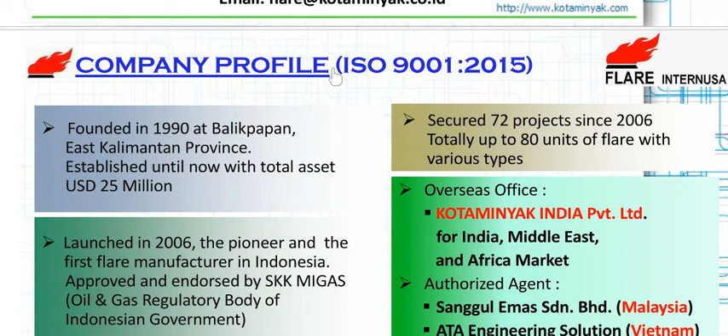This is Flare INTERNUSA Experience at Kotaminyak. Founded in 1990 at Balikpapan, East Kalimantan province, established until now with total asset $25 million. Flare INTERNUSA is launched in 2006, the pioneer and the first flare manufacturer of Indonesia.

Approved and endorsed by SKK Migas, oil and gas regulatory body of Indonesian government. Starting 2011 business expansion to worldwide market. Manufacturing facilities located at Dadap, Jakarta with workshop of 2,700 square meter and warehouse of 1,800 square meter.

Secure 72 projects since 2006. Totally up to 80 units of flare with various type. Overseas office is in India, Middle East and Africa market.

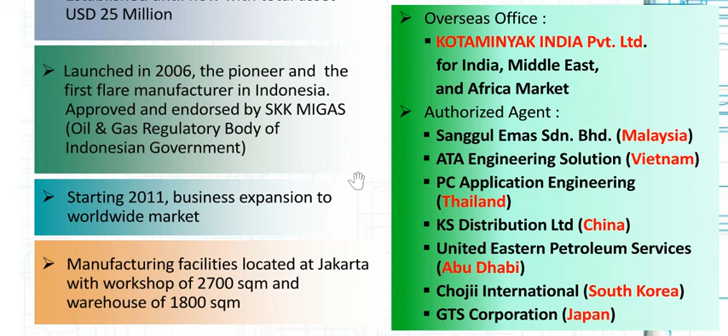Authorized agent, Sanggul Emas at Malaysia, ATA Engineering Solution at Vietnam, PC Application Engineering at Thailand, KS Distribution Limited at China, United Eastern Petroleum Services at Abu Dhabi, Chojii International at South Korea and GTS Corporation at Japan.

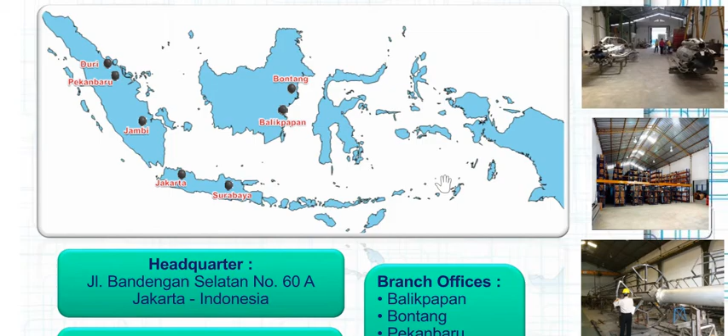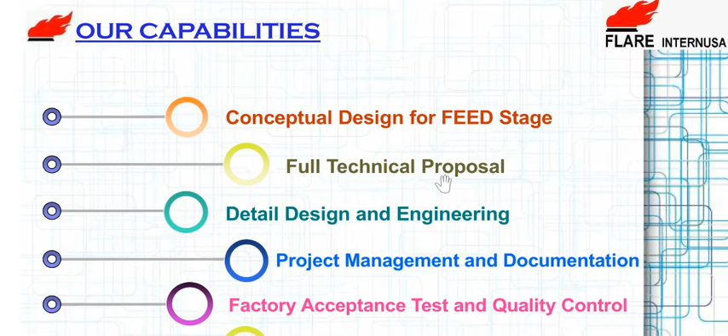Our capabilities: conceptual design for FEED stage, full technical proposal, detailed design and engineering, project management and documentation, factory acceptance test and quality control, commissioning and troubleshooting, customer support and after-sales service.

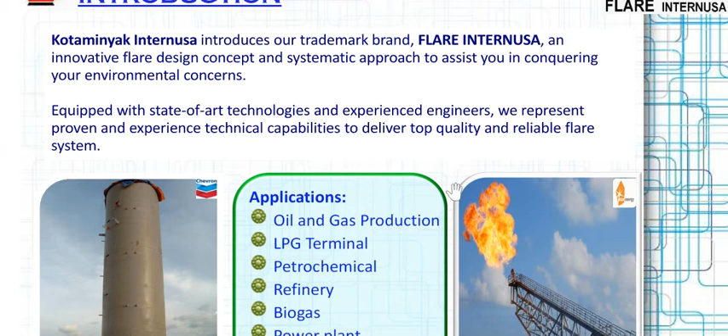Flare INTERNUSA is an innovative flare design concept and systematic approach to assist you in conquering your environmental concern. Equipped with state-of-art technologies and experienced engineers, we represent proven and experienced technical capabilities to deliver top quality and reliable flare system. Application to oil and gas production, LPG terminal, petrochemical, refinery, biogas, power plant, fertilizer plant, and so on.

Our customer. The overseas market is 10%, Indonesia is 46%, G7, Europe, and Australia is 42%, the others is 2%.

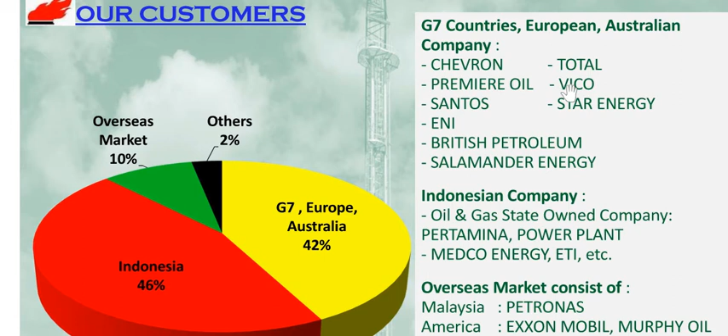The G7 countries, European and Australian company includes Chevron, Total, Premier Oil, VICO, Santos, Star Energy, Eni, British Petroleum, Salamander Energy. Indonesian company, oil and gas state-owned company, Pertamina Power Plant, Medco Energy, ETI, and etc.

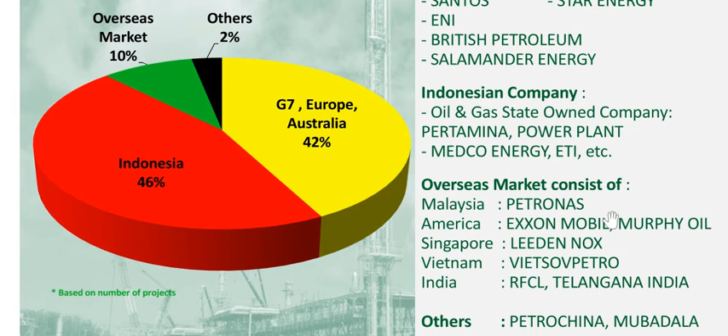Overseas market, Malaysia is Petronas, America is ExxonMobil and Murphy Oil, Singapore is Leeden NOX, Vietnam is Vietsovpetro, India is RFCL, Telangana, India, and others PetroChina and Mubadala.

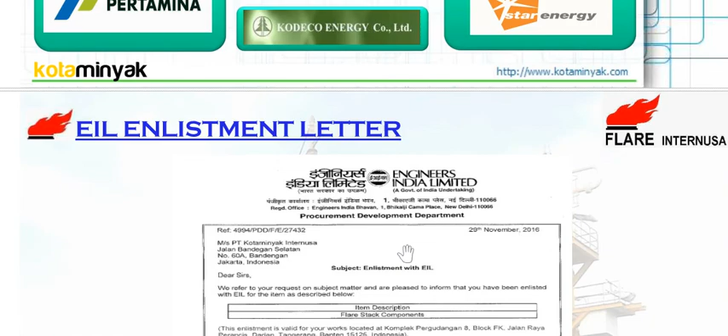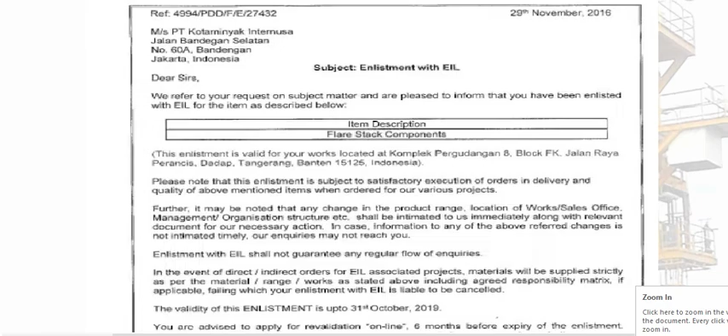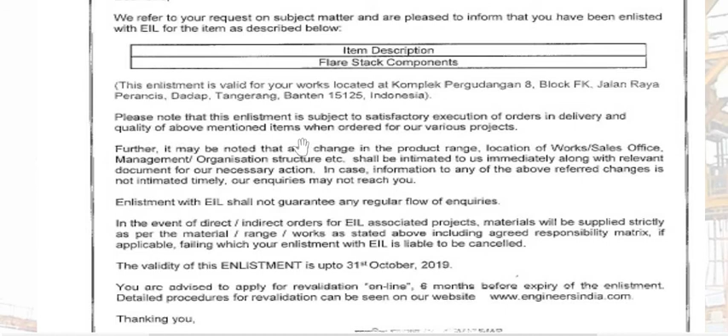Please note that this enlistment is subject to satisfactory execution of order in delivery and quality of above mentioned when ordered for our various project. Flare stack components.

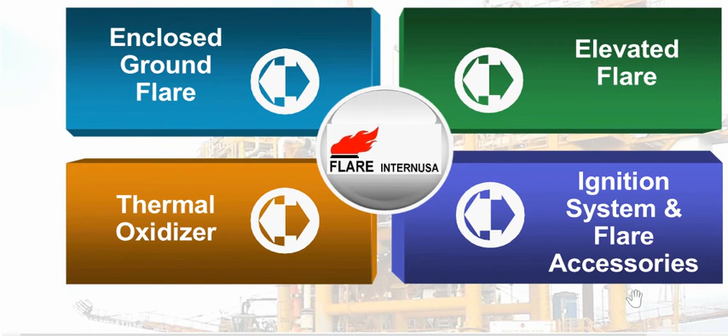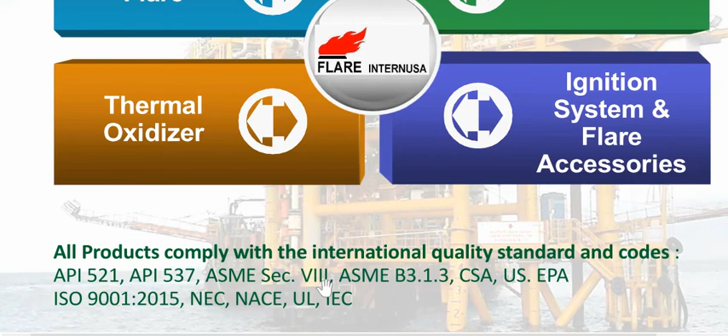So Flare INTERNUSA consists of enclosed ground flare, elevated flare, thermal oxidizer, ignition system, and flare accessories. All products comply with the international quality standards and codes: API 521, 537, ASME Section 8, ASME B31.3, CSA, US EPA, ISO 9001:2015, NEC, NACE, UL and IEC.

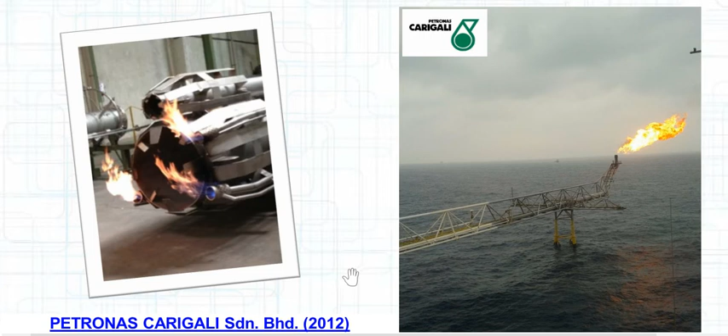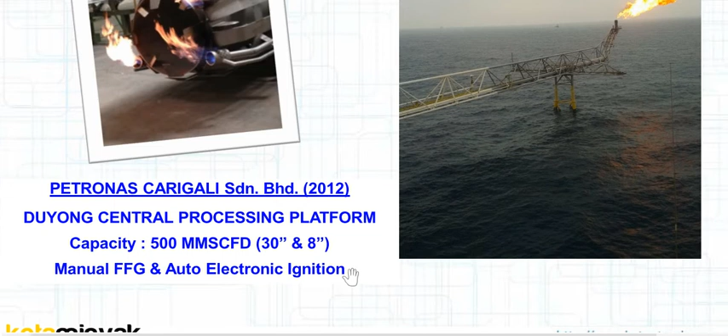High and low pressure flare are common with combined ignition. Project at Petronas Carigali 2012. Capacity is 500 MMSCFD, 30 inch and 8 inch. Manual FFG and auto electronic ignition.

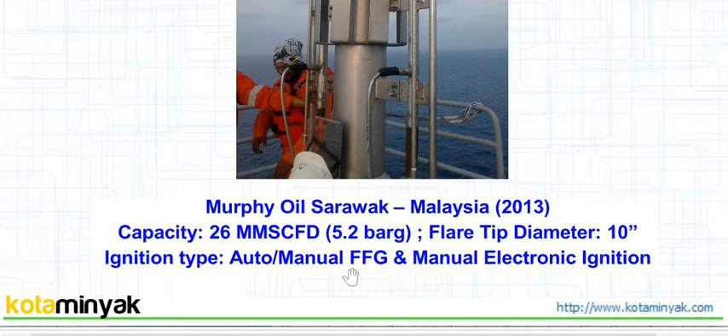High pressure flare at Murphy Sarawak Oil Corporate Limited, 2013. Capacity is 5.2 bars. Flare tip is 10 inch. Ignition is auto or manual FFG and manual electronic ignition.

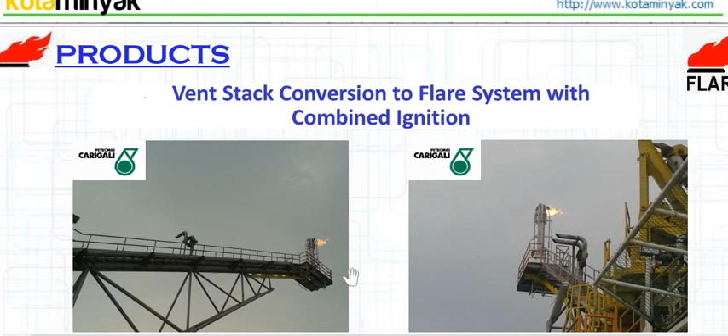We are looking at the experience. Vent stack conversion to flare system with combined ignition. Carigali, Petronas. Location is at Dulang, Malaysia. Capacity is 10 MMSCFD. Flare tip is 10 inch. Ignition type is combined manual FFG and manual electronic spark.

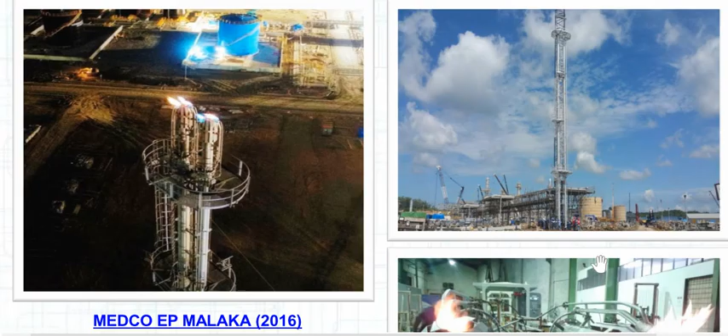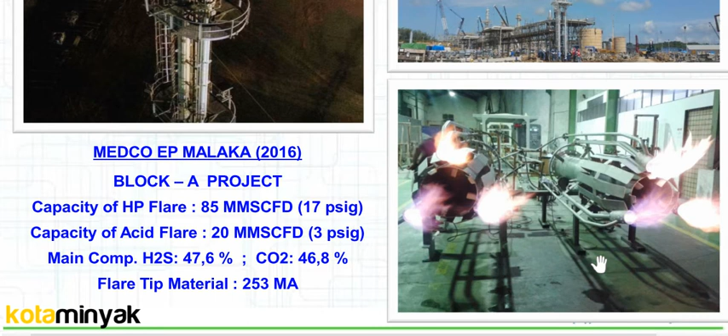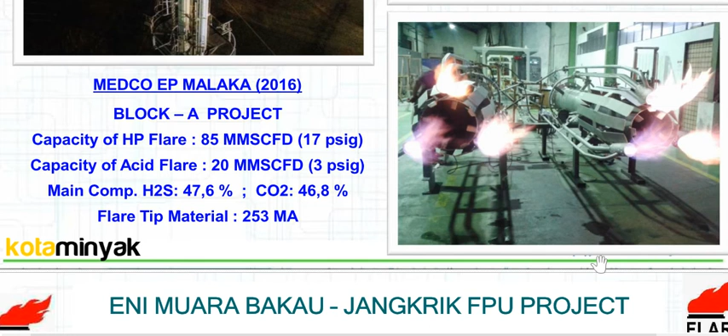High pressure flare and acid gas flare at Medco EP Malaka 2016. Block A project capacity of high pressure flare is 85 or 17 psi. Capacity of acid gas is 20 MMSCFD or 3 psi. Main component is H2S 47.6%, CO2 46.8%. Flare tip material is 253 MA.

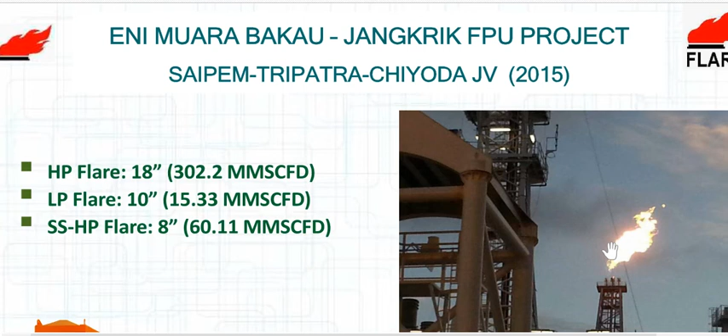Eni Muara Bakau, Jangkrik FPU project, Saipem Tripatra Chiyoda JV 2015. HP flare is 18 inch, LP flare, low pressure flare is 10 inch. SS stainless steel high pressure flare is 8 inch.

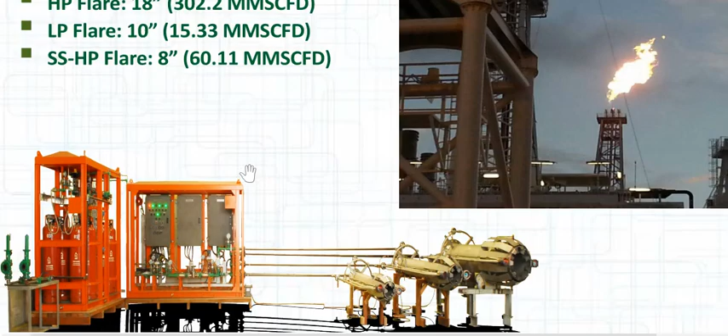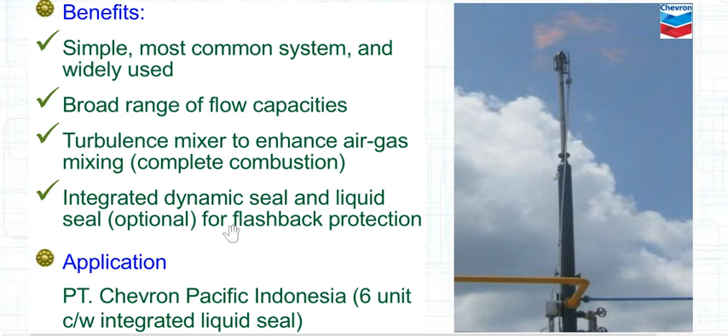Benefits of low pressure flare. Simple, most common system and widely used. Broad range of flow capacities, turbulence mixer to enhance air gas mixing, integrated dynamic seal, and liquid seal for flashback protection. Application is PT Chevron Pacific Indonesia.

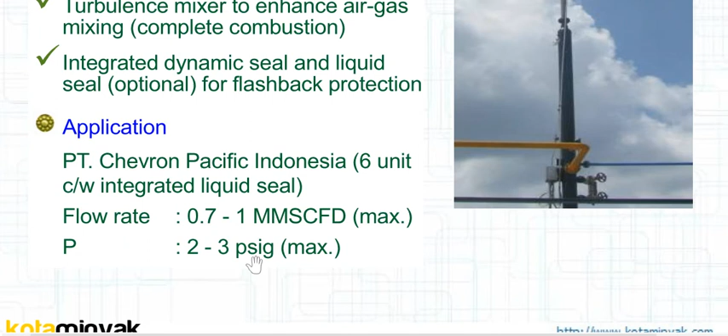6 units come with integrated liquid seal, with flow rate 0.7 to 1 MMSCFD maximum, and pressure is 2 to 3 psig. Combined high and low pressure flare. Benefits is high and low gas pressure are burned in one compact design.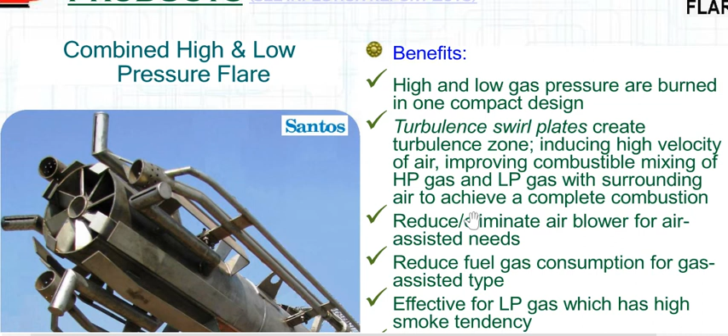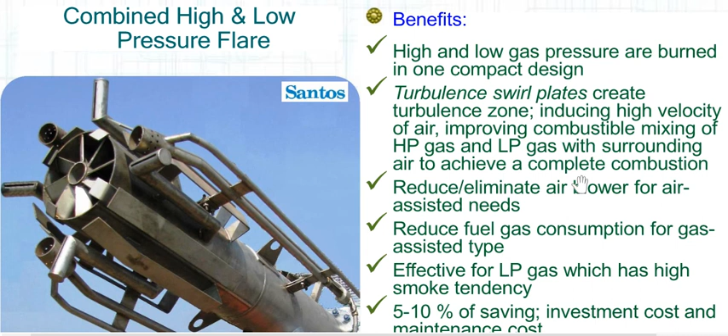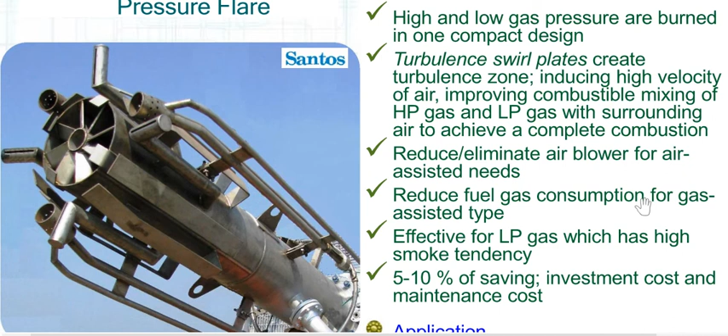Turbulence swirl plate create turbulence zone inducing high velocity of air, improving combustible mixing of high pressure gas and low pressure gas with surrounding air to achieve a complete combustion. Reduce or eliminate air blower for air assisted needs. Reduce fuel gas consumption for gas assisted type. Effective for low pressure gas which has high smoke tendency, 5 to 10% saving.

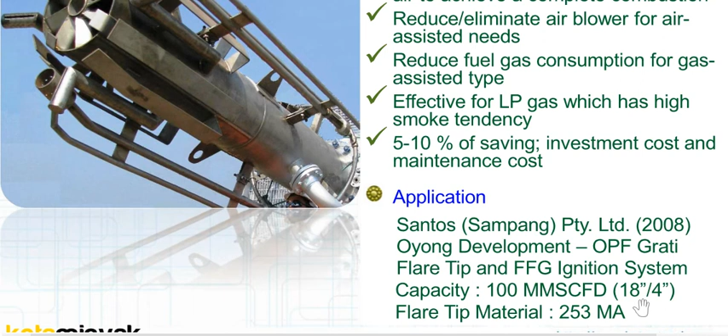The application is at Santos, Sampang at 2008. Oyong development with the flare tip and FFG ignition system. Capacity is 100 MMSCFD, 18 inch to 4 inch. Flare tip material is 253 MA. Combined high-low pressure flare. Star Energy.

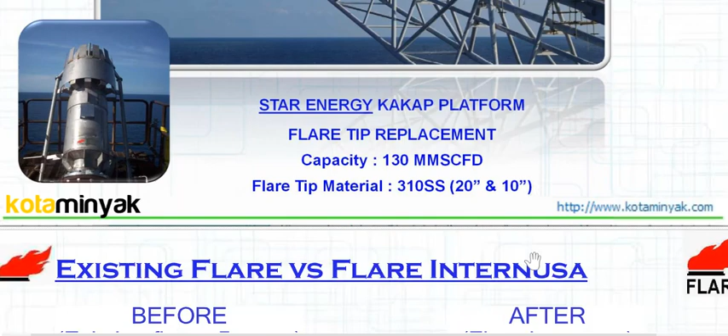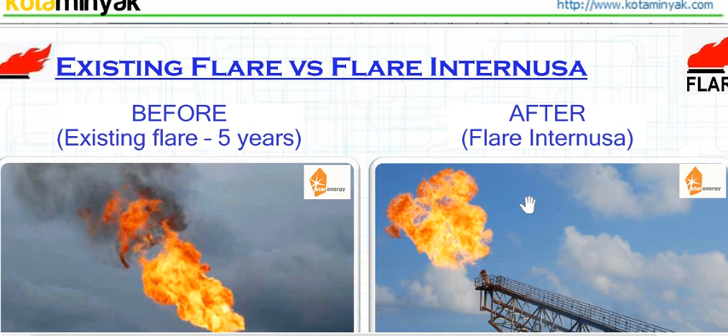Capacity is 130 MMSCFD. Flare tip material is 310 stainless steel, 20 inch and 10 inch. Existing flare versus Flare INTERNUSA, before and after.

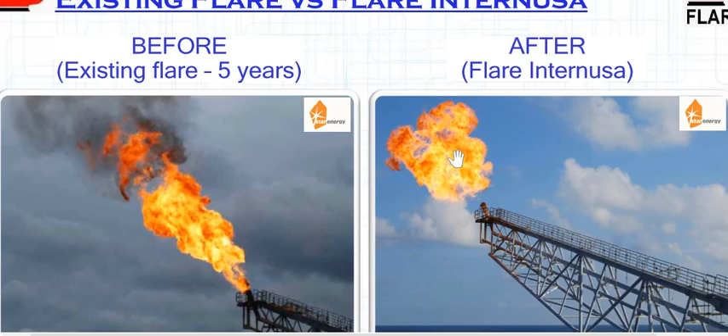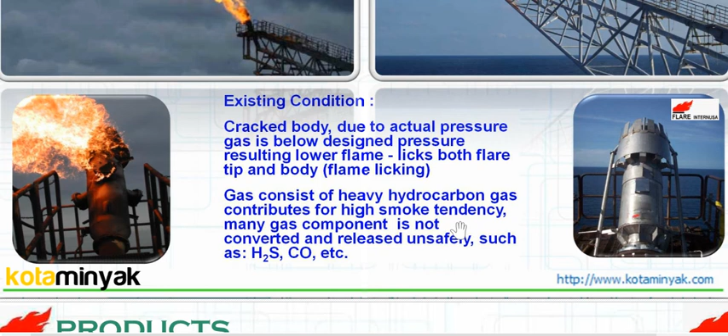For the existing flare, they have fumes. Flare INTERNUSA doesn't have any fumes. Existing condition: cracked body. Due to actual pressure, gas is below design pressure, resulting in lower flame licks; both flare tip and body have flame licking. Gas consists of heavy hydrocarbon gas, which contributes to high smoke tendency. Many gas components are not converted and are released unsafely, such as H2S, CO, etc.

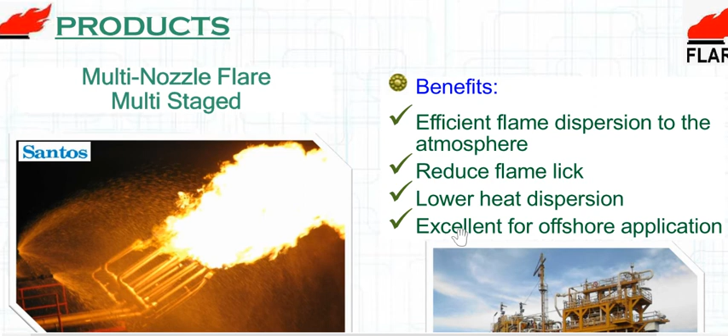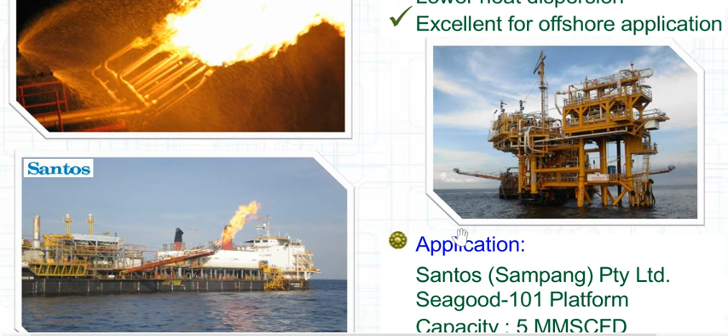The benefits of the multi-nozzle multi-stage flare: efficient flame dispersion to the atmosphere, reduced flame lick, lower heat dispersion, excellent for offshore application. Application is at Santos, Seagood 101 platform, capacity is 5 MMSCFD, flare tip material is 253 MA.

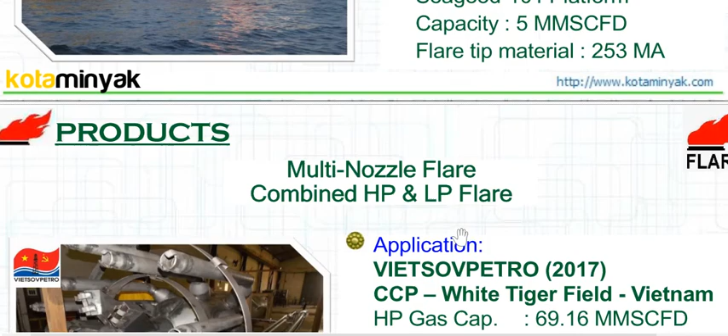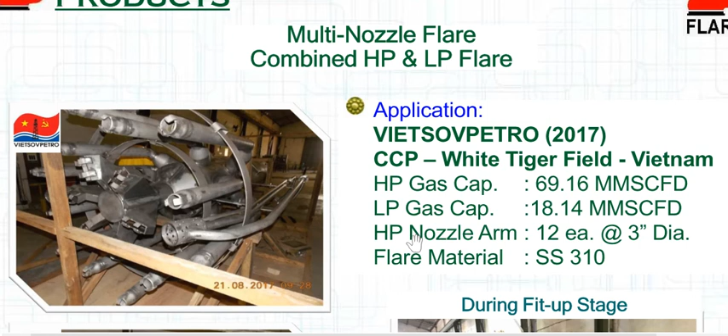Multi-nozzle flare combining high pressure and low pressure. Application in Vietsovpetro 2017 at CCP White Tiger Field, Vietnam. High pressure gas capacity is 69.16 MMSCFD. Low pressure gas capacity is 18.14. High pressure nozzle arms are 12 pieces at 3-inch diameter. Flare material is stainless steel 310. As you can see in the picture, during the fit-up stage.

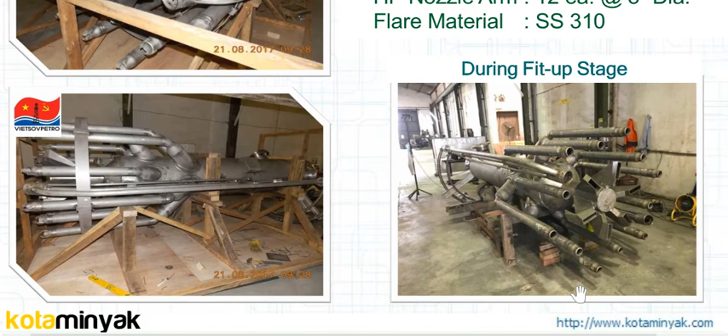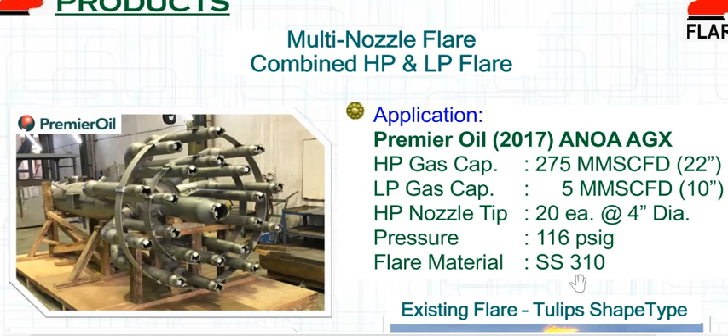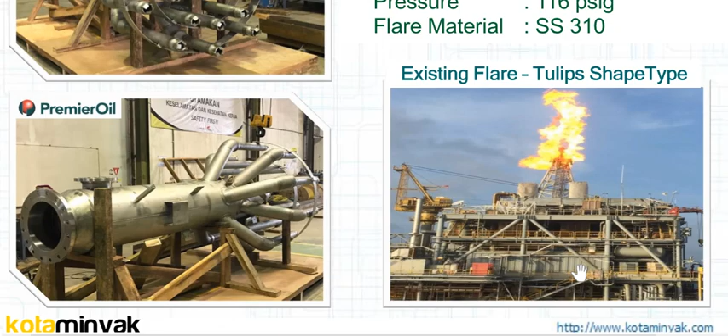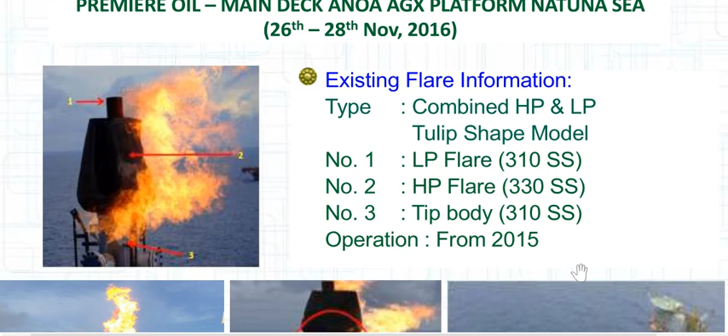Combined high pressure and low pressure tulip shape model. Number 1, low pressure flare, is 310 stainless steel. High pressure flare, number 2.

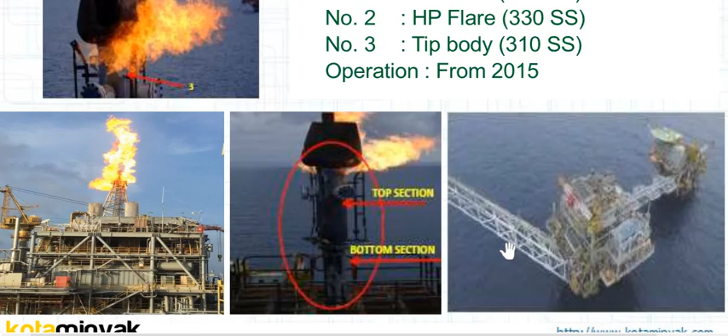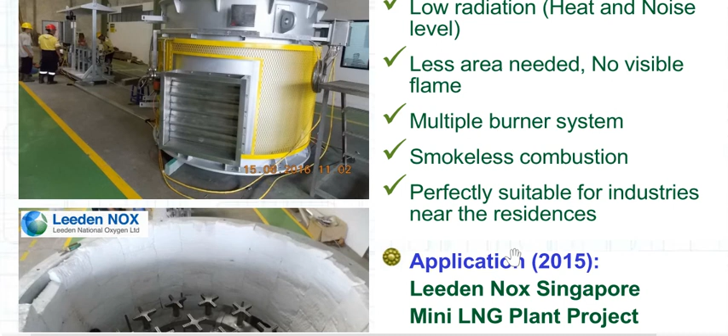Enclosed ground flare. Benefits: low radiation, heat and noise level, less area needed, no visible flame, multiple burner system, smokeless combustion. Perfectly suitable for industries near residences. Applications in Singapore, mini LNG plant project, up to 4.6 MMSCFD with 900 BTU per SCF. Diameter is 2 meters times 7.2.

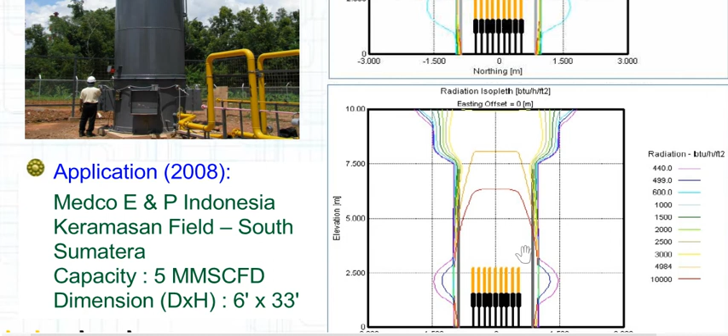Next, application of enclosed ground flares at Medco E&P Indonesia, Keramasan Field, South Sumatra. Capacity is 5 MMSCFD. Dimension is 6 feet times 33 feet.

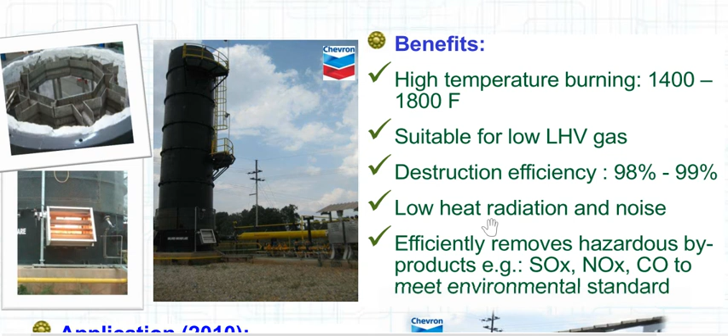Thermal oxidizer. High temperature burning, 1,400 to 1,800 Fahrenheit. We are talking about an enclosed thermal oxidizer, suitable for low LHV gas. Destruction efficiency is 98% to 99%. Low heat, radiation and noise. Efficiently removes hazardous byproducts such as SOx, NOx, and CO to meet environmental standards.

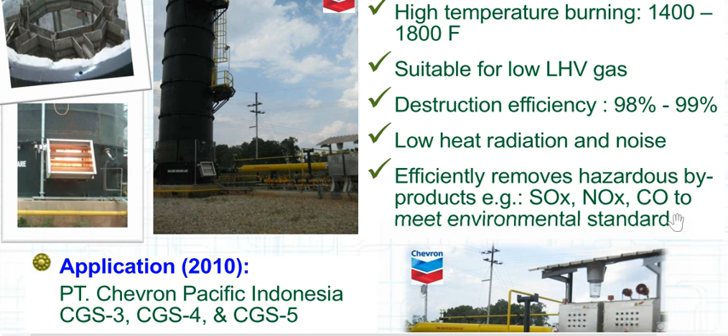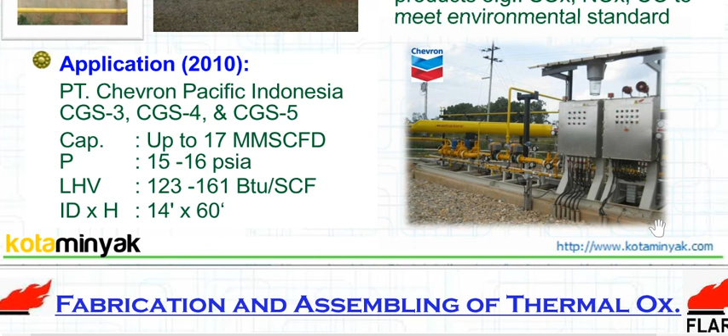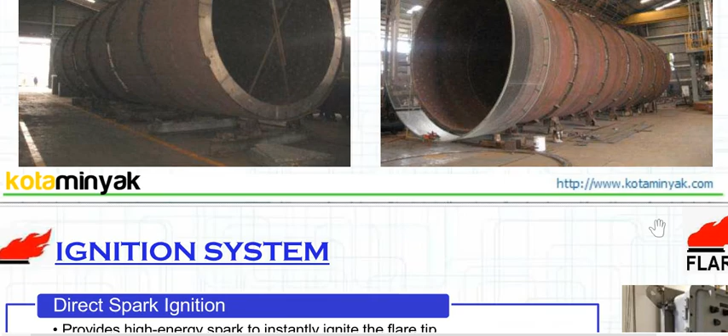Application is PT Chevron Pacific Indonesia. Capacity up to 17 MMSCFD. Pressure is 15 to 16 psi. LHV is 123 to 161 BTU, 14 feet times 60 feet. Fabrication and assembly of thermal oxidizer at Chevron.

Ignition system: direct spark ignition. Provides a high energy spark to instantly ignite the flare tip. Requires electricity only. Highly suitable for remote areas with limited utility facilities such as air supply and fuel gas. Reliable and no carbon deposit.

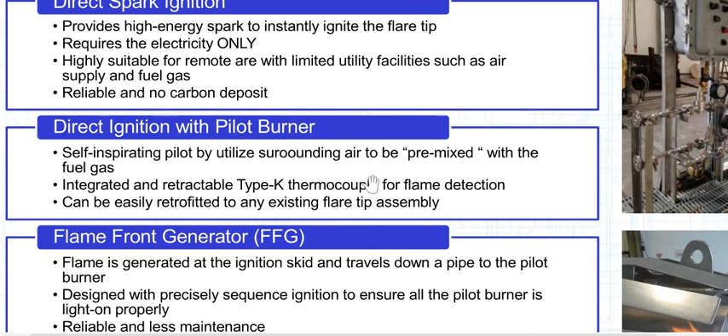Direct ignition with pilot burner. Self-inspirating pilot utilizing surrounding air to be premixed with the fuel gas. Integrated and retractable Type K thermocouple for flame detection. Can be easily retrofitted to any existing flare tip assembly.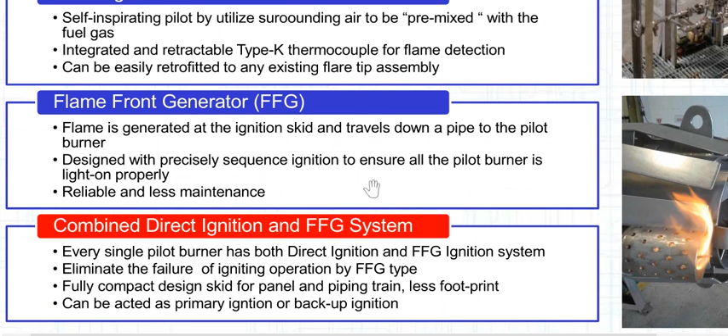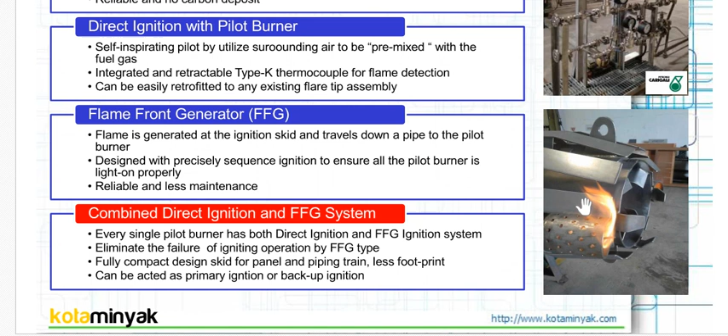Flame front generator. Flame is generated at the ignition skid and travels down a pipe to the pilot burner, designed with precise sequence ignition to ensure all pilot burners light properly. Reliable and less maintenance. Combined direct ignition and FFG system: every single pilot burner has both direct ignition and FFG system, flame front generator.

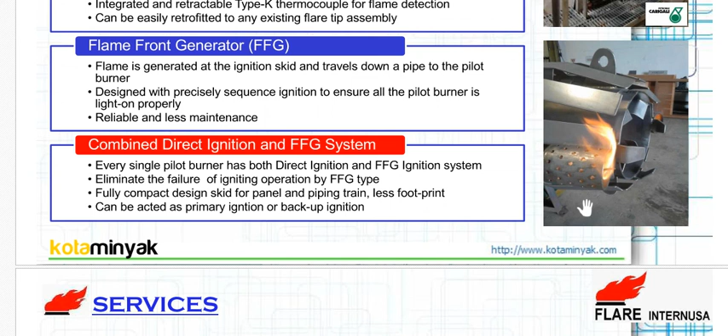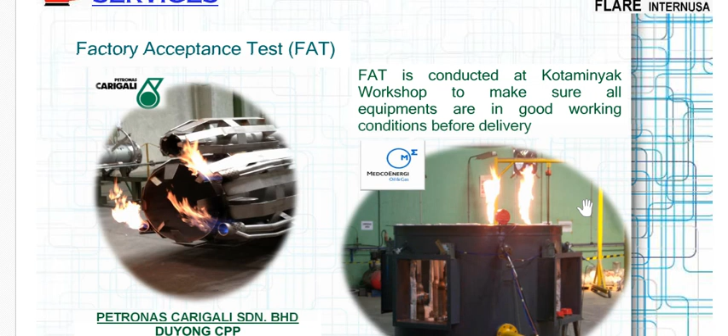Eliminates ignition failure with the FFG type, fully compact design skid for panel and piping train, less footprint, can act as primary or backup ignition. Services: factory acceptance test is conducted at the Kotaminyak workshop to make sure all equipment is in good working condition before delivery, for Petronas Carigali and PT Medco E&P Indonesia.

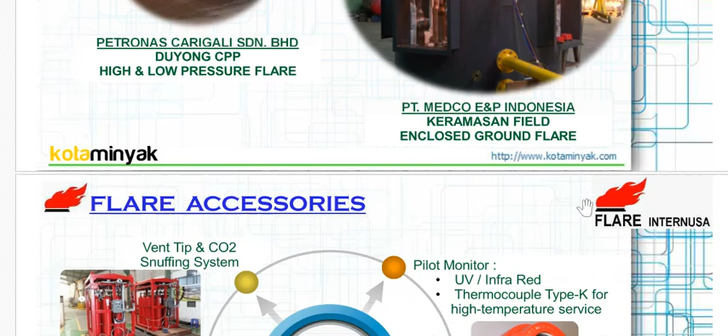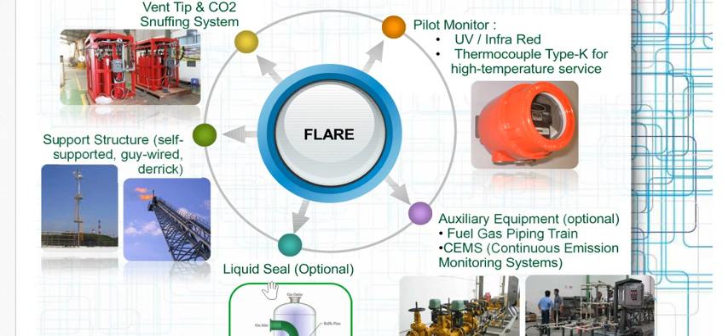Flare accessories: the vent tip and CO2 snuffing system, the pilot monitor, UV, infrared, and Type K thermocouple for high temperature service. Auxiliary equipment such as fuel gas piping train, CEMS, continuous emission monitoring system, which is optional. Liquid seal is also optional. Support structure: self-supported, guy wire, derrick.

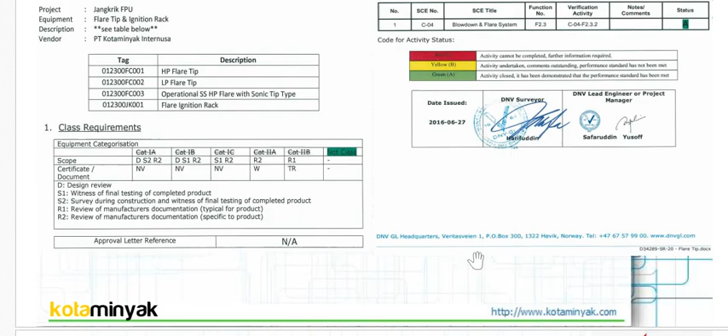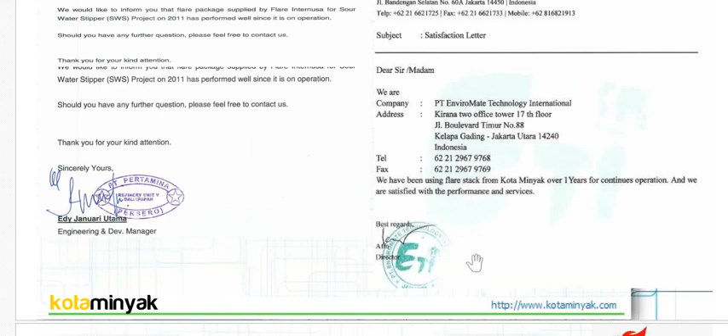Certification: we have the Jangkrik FPU survey report. Customer satisfaction from FICO and Chevron, from Indo Turbine and Consortium Wika Rabana, from Pertamina, EnviroMate, from Premier Oil, from Petronas.

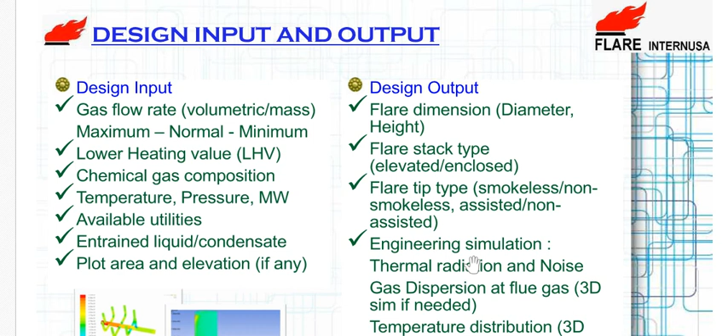Design input and output. Design input: gas flow rate maximum, normal, minimum, lower heating value LHV, chemical gas composition, temperature, available utilities, entrained liquid condensate, plot area, and elevation if any. Design output: flare dimension, diameter, and height. Flare stack type, flare tip type, smokeless or non-smokeless, assisted or non-assisted. The flare stack type is elevated or enclosed.

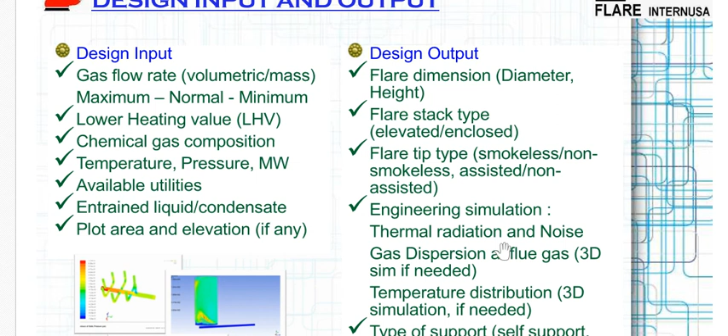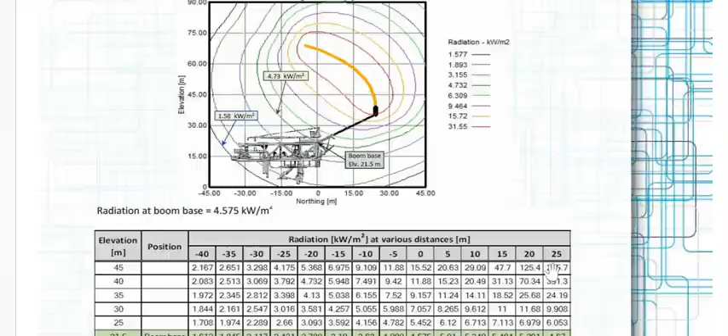Engineering simulation: thermal radiation and noise, gas dispersion, flue gas 3D simulation if needed, temperature distribution, type of support, safety device. Thermal radiation at 32 km per hour of wind speed, noise level at 32 km per hour of wind speed. This is the test. Gas dispersion at 32 km per hour.

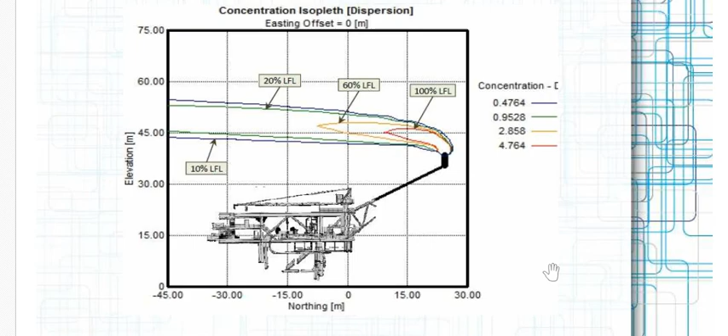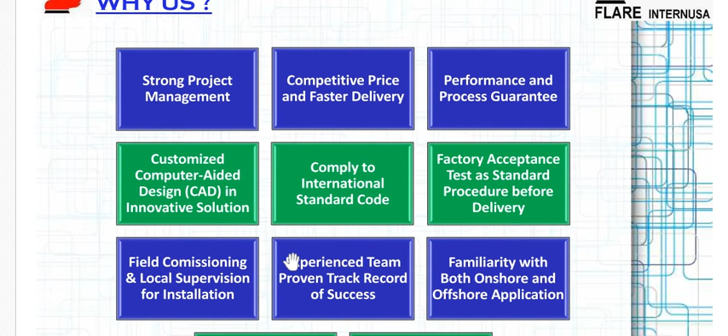Why us? For Flare INTERNUSA, we have strong project management, competitive price and faster delivery, performance and process guarantee, customized computer-aided design and cutting-edge innovative solutions, compliance with international standard codes, factory acceptance test as standard procedure before delivery, field commissioning and local supervision for installation, experienced team, proven track record of success, familiarity with both onshore and offshore application, numerous installations in the oil and gas industry in Indonesia and Malaysia, ample spare parts.

In conclusion, we have seen the capability and experience of Kotaminyak in Flare INTERNUSA, proudly made in Indonesia.